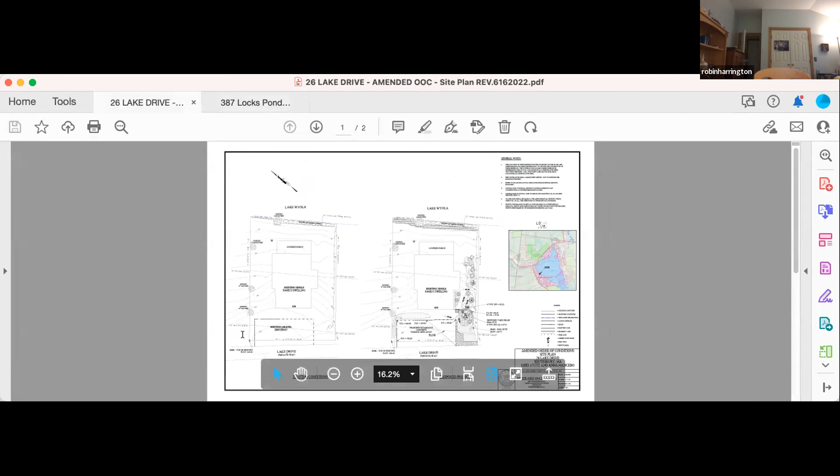Okay, this is not it—that's for a different hearing. Let me see if I can blow it up a little bit. Can you guys see? Is this it? Yep, that's it. All right, so why don't you take a few minutes and just walk us through it?

Okay, so I've come into this project a little bit late, but I'm hoping what we have here will make the commission feel more comfortable with the proposed amendment to the order of conditions, to change the 24 by 55 foot parking area from a gravel parking area to a bituminous concrete asphalt driveway. The portion on the left-hand side is the existing condition: the house is centered in the middle, the existing gravel driveway to the left, I guess the west side, then the fencing, and some existing shrubbery down by the lake. On the right-hand side is the proposed project—the footprint doesn't change, we just make it asphalt.

By doing so, what we now propose—well, I have to blow it up on my side so I can see it. You want me to blow it up more? I can see mine, if it's easier for the commission members to blow it up. Yeah, that would probably be a little helpful.

So what we proposed is we are going to have all of the surface flow from the proposed parking area go through a series of what we're calling rain gardens—not necessarily a true rain garden, but flattened areas with quite a bit of planting in them and some depressions for infiltration purposes. So the flow will go from the left-hand side of the site to the right.

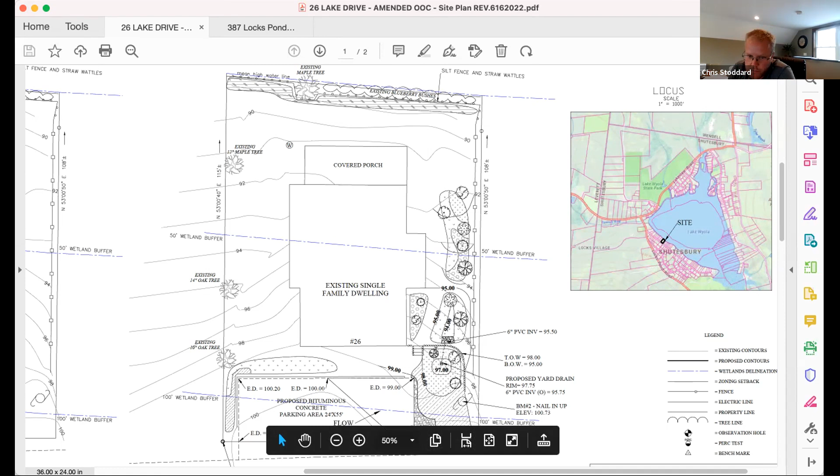It'll go through all these native areas. Here we have a flat area with about a foot of depression in it, right here, that'll basically infiltrate all the water. Anything from a big major storm will overtop into a small 6-inch yard drain, then flow into an additional level spreader, level area.

Which will then continue to infiltrate into there. Any additional runoff, which we're not proposing any, would go down through this third series of rain garden area, basically infiltrating the rest of it. And then, down at the lake, we are showing the added 5-foot planting strip along the length of the property, which was in the original order of conditions.

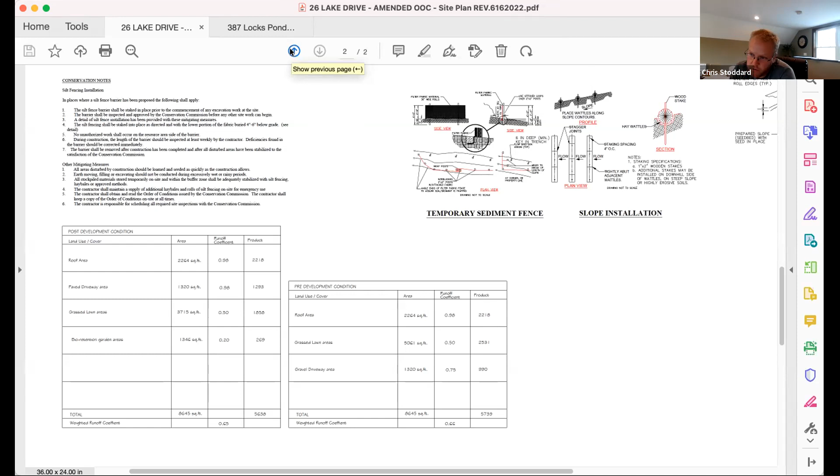So if you go to page 2, what we did is take the pre-development conditions—building, gravel area, and lawn—and compared that, creating a weighted runoff coefficient of 0.66. Then we took our post-development, the proposed project, and we've actually reduced the runoff on the site down to 0.65. So we believe we've proved that by putting the asphalt in but adding these other features, we're able to reduce the runoff from what is currently on the site now.

And you can see too, on the left-hand side, right between the house and the driveway, what we did is add some more plantings in there just in case. The intention is the grading of the parking lot is to go towards the planting area, but we added a little bit more as an added protection. It's not necessary, but you never know—we just wanted to be prepared.

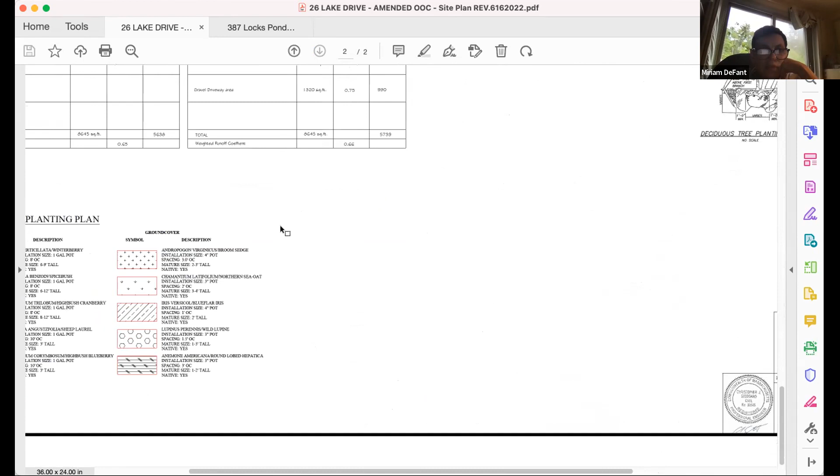We did provide a proposed planting plan on the next sheet with all native species—grasses, let me see if I can find it—below, yeah, right over there. Some winterberry, spicebush, cranberry, some blueberry bushes, wild lupin, sea oats, broom sedge, a bunch of different variations of plantings that we thought would complement the site, but also reduce the runoff rate and help the infiltration of water prior to reaching the pond.

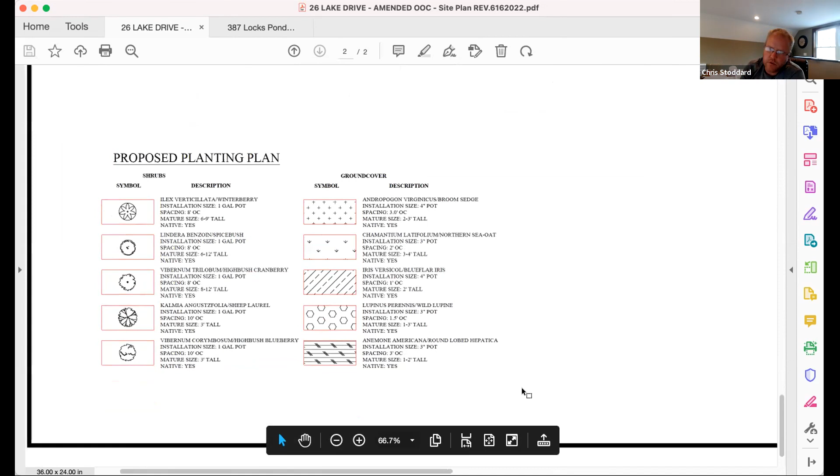We did provide some details, some straw wattles and silt fence details. We are proposing, if you could go up towards the lake—there's a series of existing blueberry bushes right up against the water—silt fencing and straw wattles on the lake side of all the proposed plantings. There are some straw wattles on site currently, but we're proposing to add more right along the edge, so we can plant everything outside of the protected area. Once the site is fully stabilized and the commission has had a chance to do their final inspection, we'd obviously remove that.

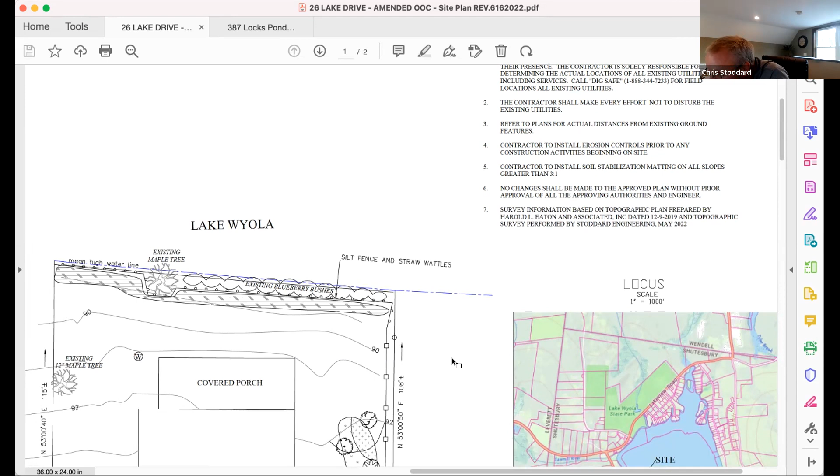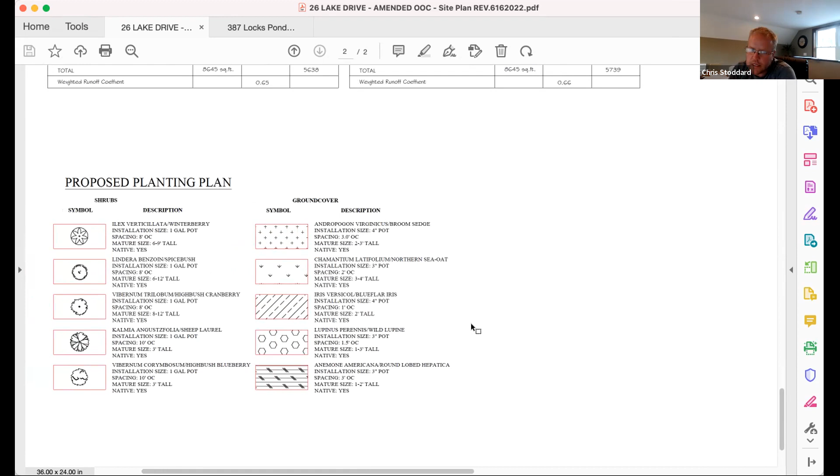And what would be planted down by the lake—has that been decided? We went back and forth trying to find plants that were native but also pretty, I'll call them. I'm probably going to butcher the name—Anemone americana is what we found. They're about a 1 to 2 foot tall bush, spaced about 3 feet apart. They come in 3-inch pots and grow out to be about 3 feet. They're native to this area, a hardy plant for this zone, so we thought that was a nice complement—gives some flowering plants but also serves as that buffer.

Trying to think what else—no trees are being removed, so I know that was a question before. All the existing maple trees and oak trees along the property lines are not being removed, those are all staying. The arborvitaes that were there, everything over there—basically everything on the left-hand side of the structure is staying as is.

So I hope this makes the commission feel a little better about the project, but we can answer any questions that you folks have.

One of the questions I had when we did a site visit—we noticed, and now let me see if I can get this thing to disappear—in this corner where the cursor is, on the right-hand side, it looked like there was a Japanese barberry shrub. We were wondering whether the landowners were planning on keeping that or if they'd be open to removing it, because it's an invasive species.

I guess I could have, if Anna wants to answer that question. What, I'm sorry, just if you wouldn't mind putting your cursor there again where it exists, Miriam?

Yeah, it's hard to see because this control panel keeps popping up, but it's in this corner to the right-hand side, somewhere right here. What does that look like, Miriam? Just remind me, is it like a pine tree or something? No, it's a shrub. Robin, do you want to describe it?

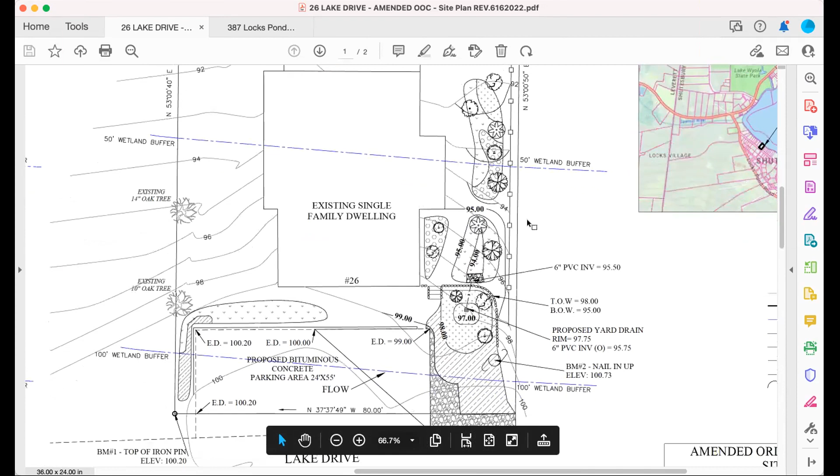Okay, I don't know what it looks like, so I'm drawing a blank, you guys, but I think that's up by where Susan, our neighbor, parks or something. I think it's right on the corner, it might be on her land. I don't know, we'd have to... we didn't know when we looked. Let me see if I have a photo.

Okay, well if it was on your property, I wonder if I might be able to pull... if I stop this, I could go get a book and hold it up to my video. I could probably pull up the site visit photos, because I think it's on the site visit photos. So if you want to give me one second.

Tiny red berries, very small leaves. It sort of grows out from a center point in the ground and all the branches go out. Part of the problem is when those branches, the tips hit the ground, they can root and keep spreading. So you can have a whole field of this stuff and it could be one plant. It's insane.

Trying to see... I mean, I don't know why I'd want to keep it, to be honest with you. It just sounds terrible. I think I just found the picture. Okay, well let me show you, and you can tell us whether you think it belongs to you.

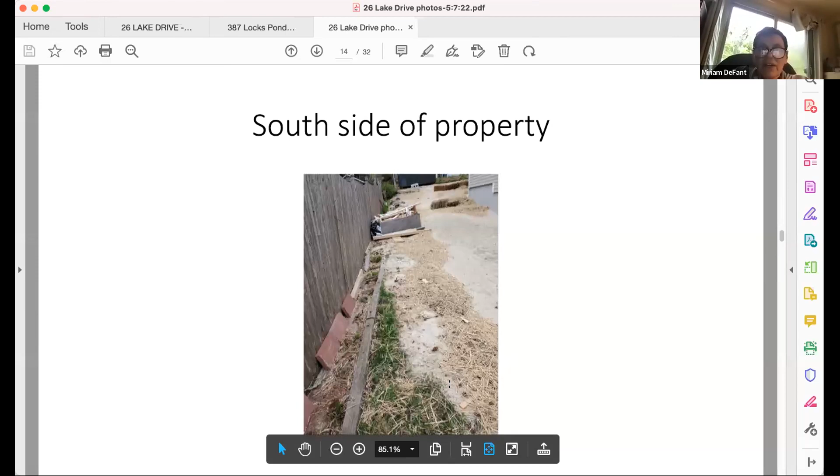So if you look at this photo, I think it's the shrub right up here. Yeah, I think, okay, yeah, I mean we can yank that, absolutely. Might even have gone by now. I mean, we've done a lot of cleaning up, Miriam, since then.

Okay, great. It has very sharp thorns. Oh, okay. I don't remember when I surveyed, because I had to locate the contours all down around there. I don't remember it being there.

But again, I think we're definitely amenable to removing it. That's part of the project. Yeah, sounds thorny, let's get it out of there if it's there.

Yes, has anybody... I'm just gonna interrupt for a second. Has anybody figured out what happened to Beth? Oh, I called the number, got no answer, got no answering machine.

Okay, well, does anybody have any questions for Chris or for the landowners? I'm gonna try and call Beth for a second and see if I can reach her on her cell. I think the cell is the number I had. I could try to look her up for a landline. I have her number, if somebody else has any questions for a sec while I'm doing that.

Of course, it's not showing up. Not right now. Miriam, the number I called was the 219. I don't have any questions. Yep, I don't have any questions either.

My only question, along with Miriam, had been the Japanese barberry. If it's yours, I feel great that you are willing to yank it. Yes, yank it. Yep.

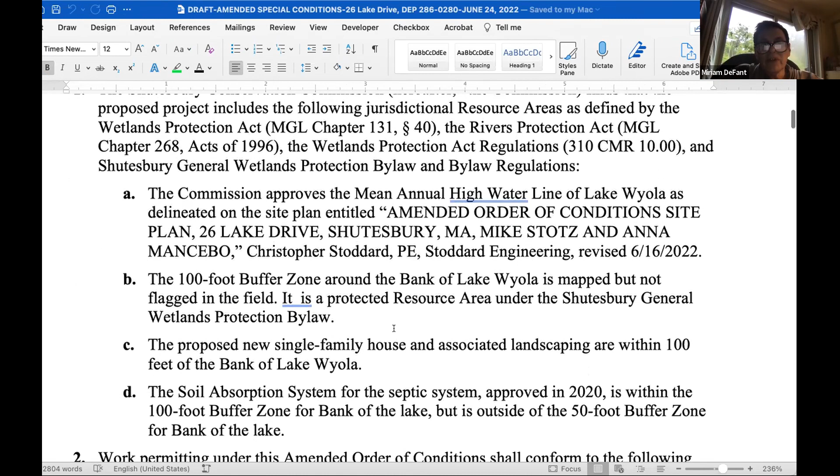We approve the mean annual high water line of Lake Wyola as delineated on the site plan. The 100-foot buffer zone around the lake is mapped but not flagged in the field. It's a protected resource area under the general bylaw.

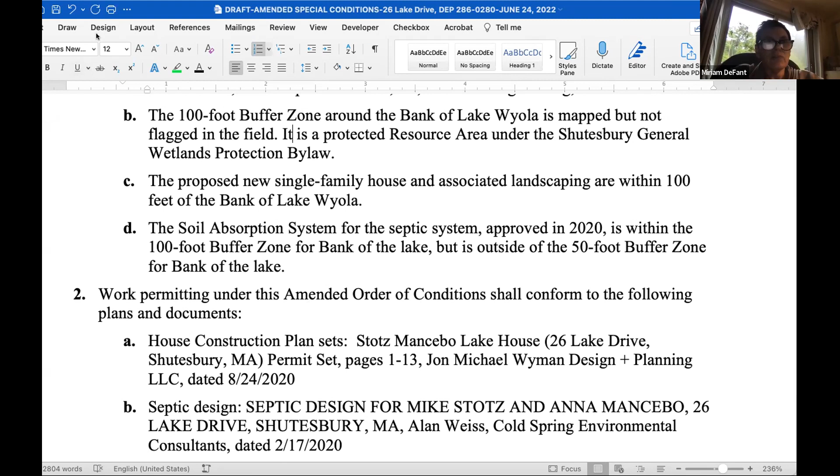The proposed new single-family home and associated landscaping are within 100 feet of the bank of Lake Wyola, and the soil absorption system for the septic system approved in 2020 is within the 100-foot buffer for the bank of the lake, but is outside the 50-foot buffer. Just making that distinction between 50 feet and 100 feet because the regulations are different.

Work permitting under this amended order of conditions shall conform to the following plans and documents. This was the original house construction sets, and then this is the new site plan submitted by Chris Stoddard, that's in yellow, and then we have the septic design. Does that look all right to everybody? Yes.

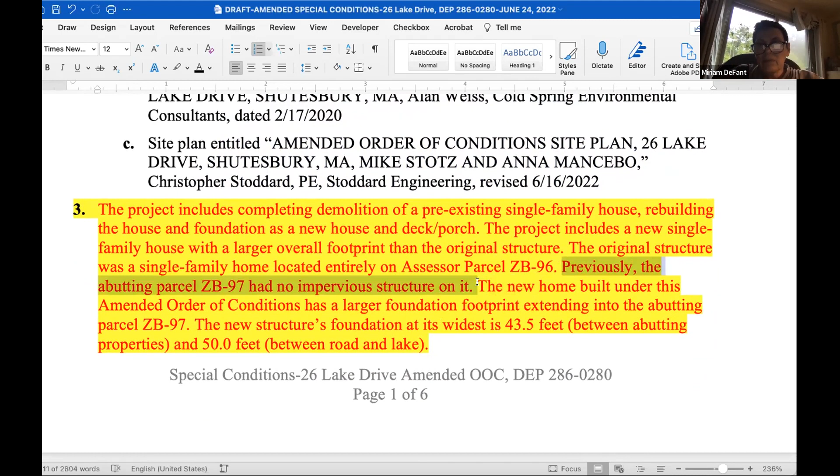And then here was a little blurb about what the project includes, about the house construction. The house includes a single family home with a larger footprint. Original structure was single family located entirely in assessor parcel ZB 96. Previously, the abutting parcel had no impervious structure on it. I'm not absolutely sure that's true, so I might take that out because I'm not certain about that. But the new home built under these conditions has a larger foundation footprint.

And then just the dimensions. Does that look all right? Yes. Okay, and then coming down here, new septic system was approved in 2020.

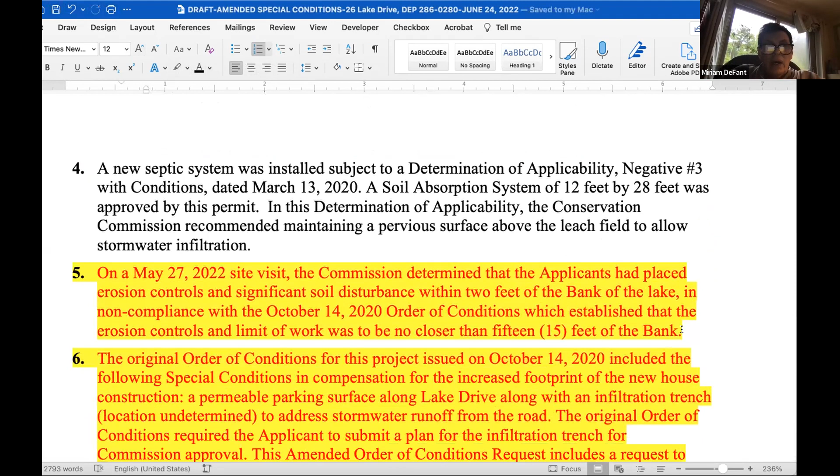I guess I should have said that the original order was approved. I don't say that anywhere, the original order of conditions. Should I say that when the original order of conditions was approved? What do you think, Bob? Is that important or not? Yeah, I think so. So the original order of conditions for this project was issued on October, oh help me out, October 14th? Actually, under number 7, it says the original order of conditions for this project.

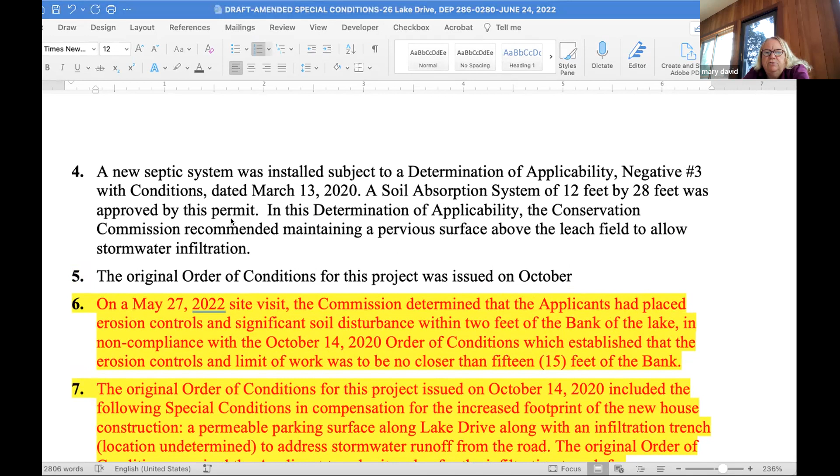Oh, see, right, I have it. I even had it. Okay.

Here I have just an observation from our site visit. Was that when we did the site visit or was it earlier? That can't be right, wasn't May 27th. It was May 7th. On the May 7th site visit, the commission determined that the applicants had placed erosion controls.

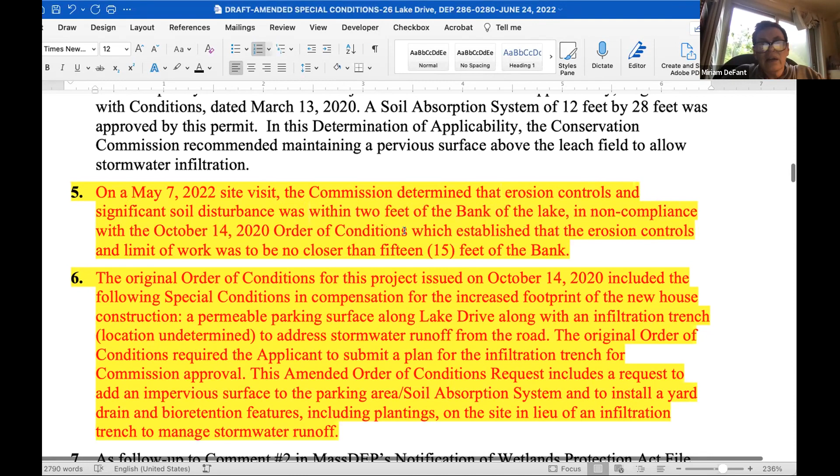Erosion controls and significant soil disturbance was within 2 feet of the bank, in non-compliance with the conditions which established that the erosion controls and limit of work was to be no closer than 15 feet of the bank. So just kind of calling attention to that piece.

Is that okay? Yes. And then here we have just a summary of what the original order of conditions were, that there was this requirement for an infiltration trench. They had to submit a plan for the infiltration trench for our approval, and no impervious surface on the driveway. So summarizing what the request was.

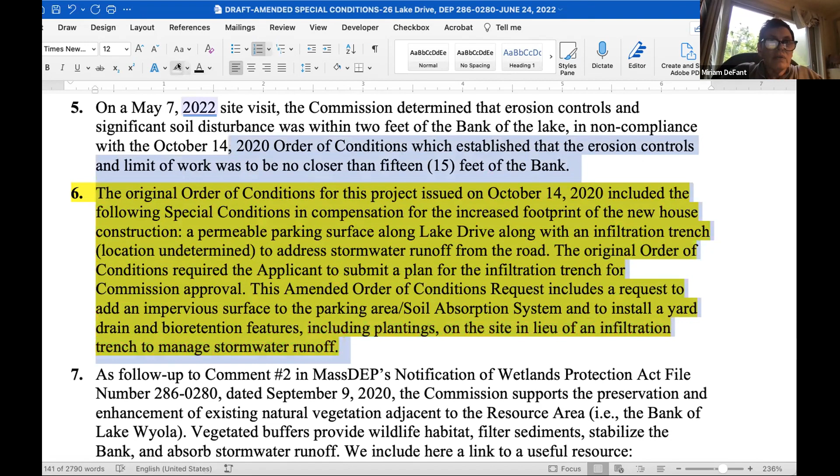And then comment from the original DEP, comments from the original notice of intent. This is again something about just a recommendation for using natural vegetation to stabilize banks, noting that Lake Wyola is a priority habitat.

And then here is the language that we find that they've met the evidentiary standard for having impervious surface on the soil absorption system, and that we find they've met the evidentiary standard for the yard drain and bioretention features. Is that all right? Yep.

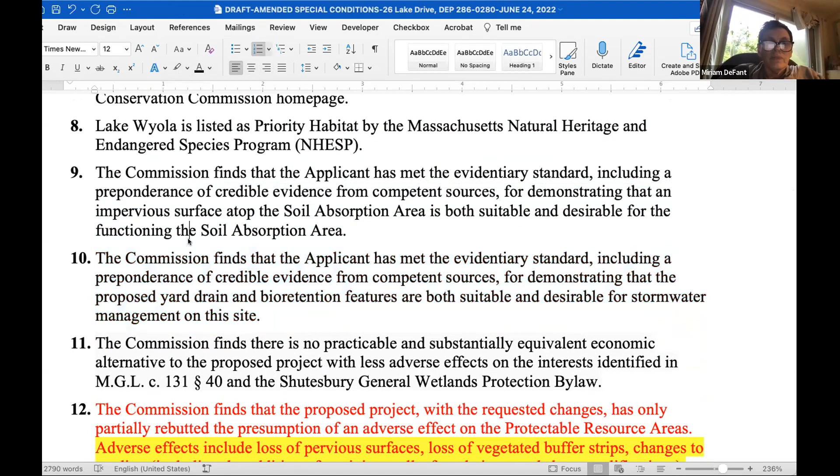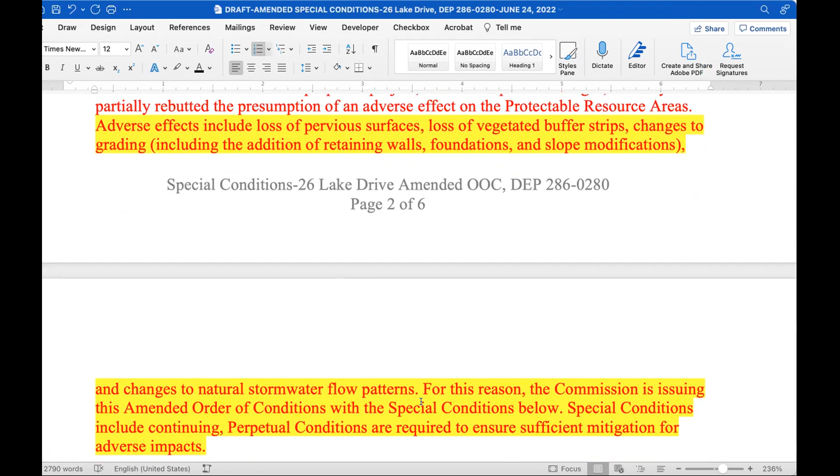And then here was a question I had. Commission finds that the project with the requested changes has only partially rebutted the presumption, or has rebutted the presumption, because if we say partially, and we want them to have, for example, the 5-foot vegetative buffer as a perpetual condition, then I think we would say partially. Also, because the limit of work went farther than was permitted in the original permit. Right.

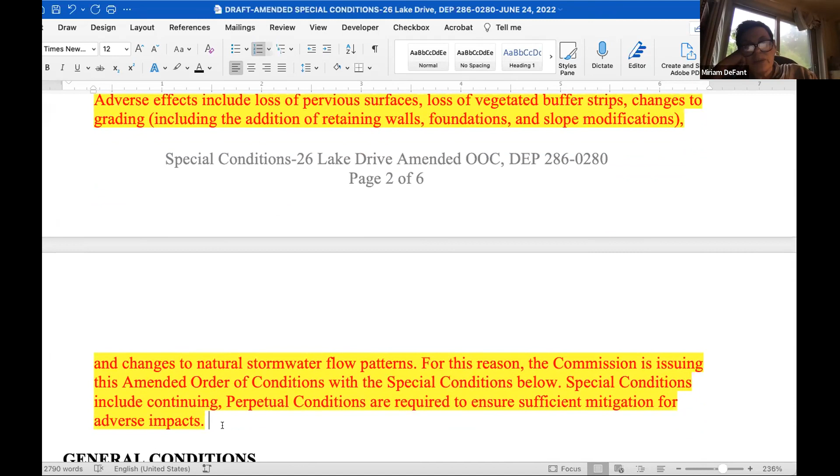Because if we're going to have perpetual conditions, we should be explaining the rationale for it. Is there a way, Miriam, to, and I don't know if this makes it easier or more difficult, but to tie that condition to the work that's been authorized?

So as long as the improvements that we're permitting are on site, this condition of the vegetative buffer would remain. So it's tied to the mitigation for the work that's being done, more than as an ongoing perpetual condition, regardless of whether or not these improvements stay over time. It may be a distinction without a difference. I'm not sure.

I don't know, I don't know. I guess I don't understand exactly what you're saying. Well, one would be - so I think what's being proposed here is, let's see if I can explain it better, a perpetual condition. So that would mean that this strip would need to remain in perpetuity as native vegetation, unless they came back and requested a modification.

Right, and I guess in my mind that adds a little bit of ambiguity in terms of what would be the rationale for requesting it, and what would the future commission be using as a condition?

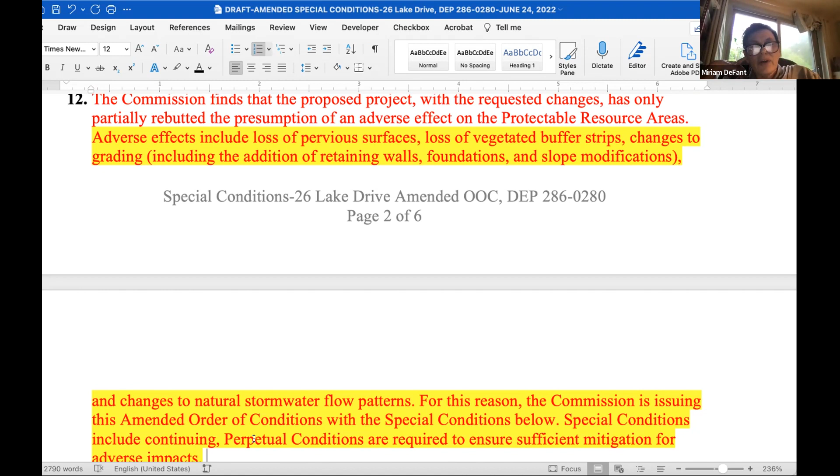The rationale for the original buffer strip was because they were approving a large - what the commission at the time felt was a large, I don't want to debate whether it was large or not, whether the commission was correct or not - but because they were approving a significant increase in impervious surfaces on the property. Yes, so this was a mitigation for that impervious surface, and because it would protect the bank.

Yes, and so what I'm suggesting is to tie it to that, so long as that larger footprint of impervious surface remains, that the buffer zone would remain. But that's specifically what we're looking to mitigate.

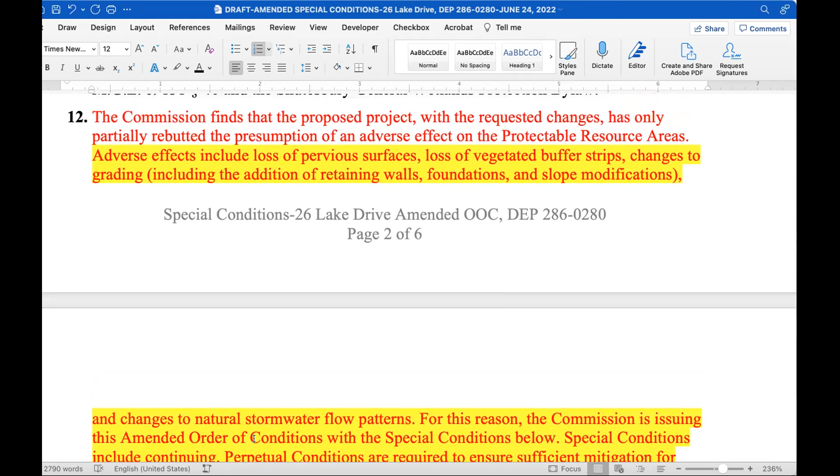So if they, for instance, if they took - isn't that what this is saying? It says the effects include the loss of pervious surfaces, loss of vegetated buffer strips, changes to grading, and changes to natural stormwater flow patterns.

Yes, but I think I'm picking up on the concern that was raised, which is the requirement of maintaining this in perpetuity. So is it clear that really the requirement isn't in perpetuity, it's for as long as these impervious surface improvements remain? That's my point.

Well, if they don't remain, I think they can always request a change, but we're permitting the order of conditions with the assumption that these are now the existing conditions, this loss of pervious surfaces. So the perpetual condition is based on what the existing conditions are, not on a hypothetical. I mean, if for example the house burns down or they demolish the house and let it go back to grassland, then they could come back and modify the order of conditions.

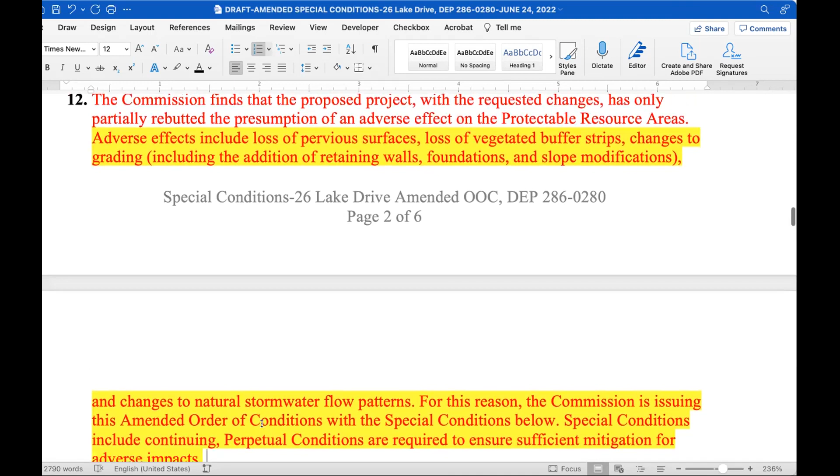Yeah, I'm just saying for purpose of clarity, my recommendation would be tying it to, for as long as these improvements of the impervious surface remain, that this would be a requirement. So I think it could be made more clear by modifying that language.

But then it isn't really a perpetual condition, and it doesn't really spell out the conditions under which they would come back for a conservation commission review of it. So if we don't have it as a perpetual condition, then there's no mechanism for the commission to review the change, Scott.

I mean, I think it's cleaner because I think that - anyway, what do other people think? I'm talking a lot. So Mary Beth, do you have any thoughts about it?

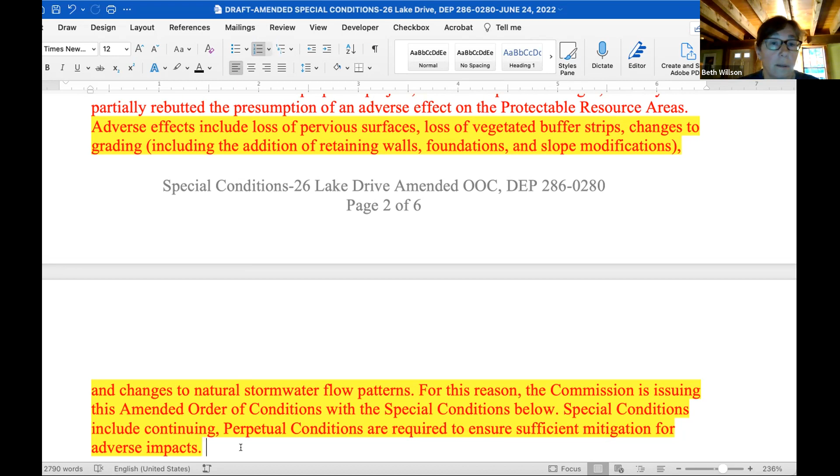I think the way it's written is fine. It makes sense to me. Yeah, me too, actually. Yeah, I think what's written is fine as it is.

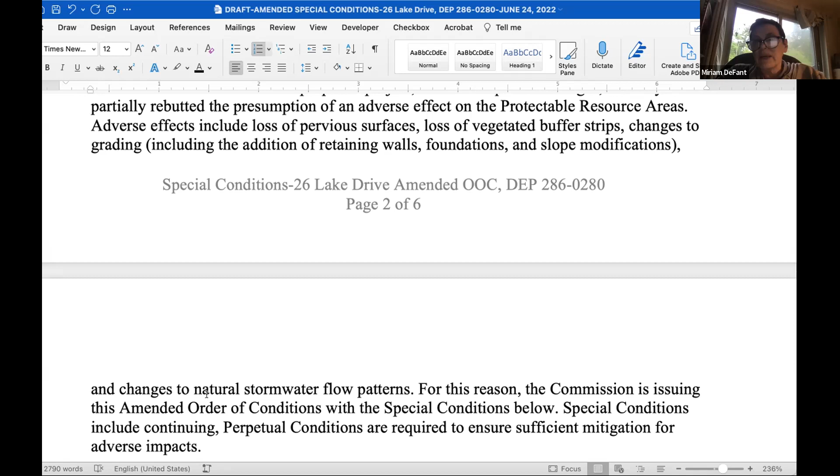Okay, I mean, it's not forever. If it is an unbearable condition, for example, let's say the bank starts collapsing and the landowners absolutely feel that they need to put in a hardscaped retaining wall along the bank, they could come back to us and we could modify those conditions based on whatever work they're proposing. So there can always be a mechanism for amending this later if it becomes necessary for the property.

Yeah, I do understand that. I think for clarity, and I understand I may be in the minority here, but I do think tying it - really it's not really a perpetual condition that we're looking for to go on regardless of the site conditions. It's tied to the improvements of the impervious surface that are being made. And so I think making that more clear would help a future commission make a decision, but I understand where you're all coming from, and I understand the rationale for making it perpetual might make it easier for the commission to entertain any future changes.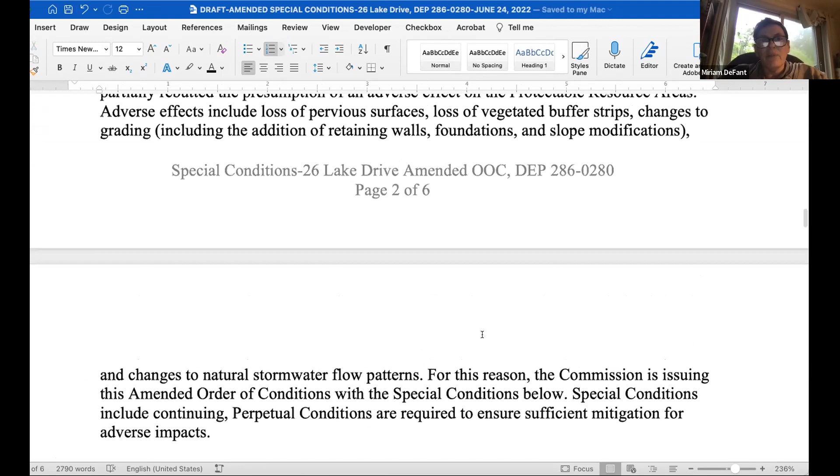Sure, I'm just saying - okay, I would do it a different way. Yeah, okay, I think it's clear. I think it is clear for future commissions to understand what our rationale was and what factors we were taking into consideration, which is really kind of the point of this, so that if there is any reevaluation in the future, it can be understood what was the commission thinking.

We need to move along. I'm looking a little bit at the time, and I know we have another public hearing in 10 minutes. So this is boilerplate.

So all of this is our standard general conditions. Nothing is new under pre-construction phase conditions. So here, I had a question.

Approved erosion controls identified in the above mentioned site plan shall be installed and maintained between the project area and the bank of the lake. Now, I put in here 15 feet, but Chris was mentioning that they want to put the erosion controls just outside of where the limit of work is right now. So we could just leave this out.

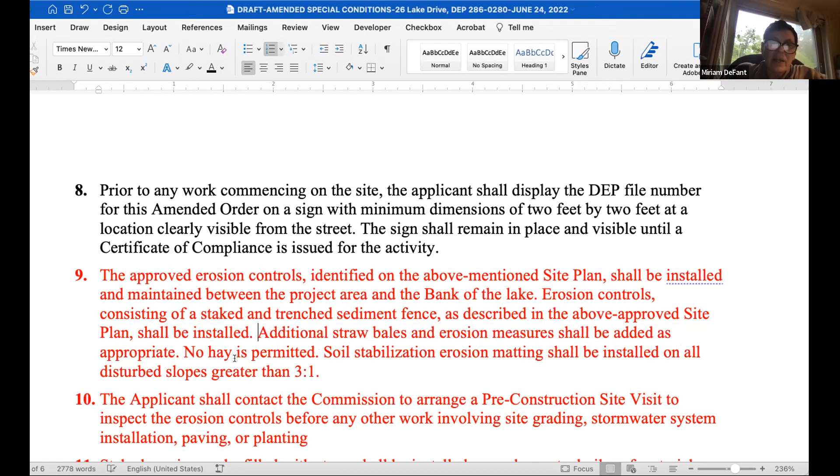So we can just say as described in the approved site plan. And how's that look? Does that look all right? Yes. Okay.

Then applicant will arrange a pre-construction site visit to inspect the erosion controls.

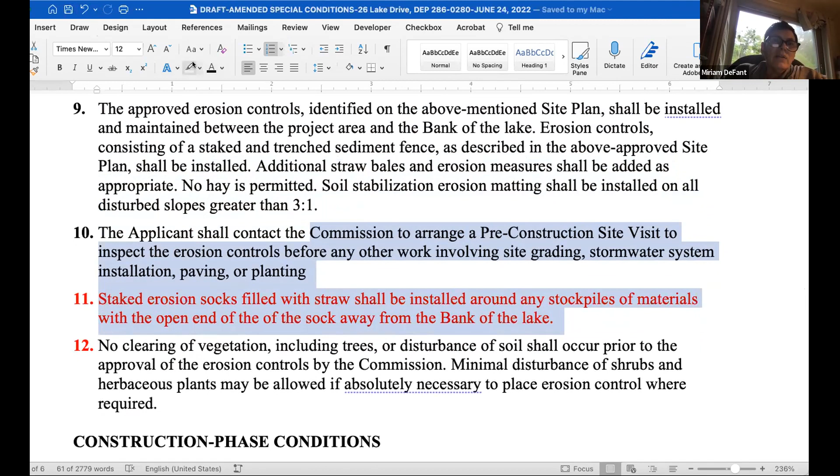Erosion socks installed around any stockpiles of materials with the open end of the sock away from the bank. I don't think that they actually talked about stockpiling. That's why I put this in here as just an added condition.

And then here, no clearing of vegetation shall occur prior to the approval of the erosion controls at the site visit. Minimal disturbance of shrubs and herbaceous plants to place the erosion controls. Look, is that all right?

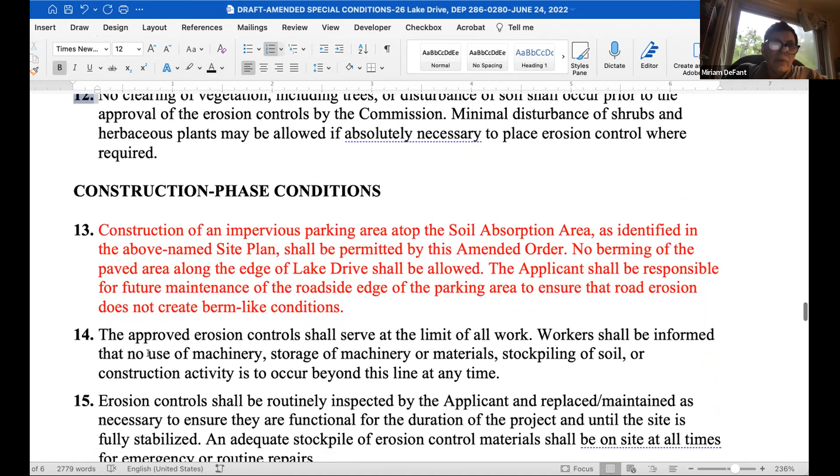Yes. Then construction of an impervious parking area atop the soil absorption area as identified in the above named site plan shall be permitted by this amended order.

No berming of the paved area along the edge of Lake Drive shall be allowed, and the applicant should be responsible for future maintenance of the roadside edge of the parking area to ensure that road erosion does not create berm-like conditions. I'm not sure if that makes sense or not, but that does.

It does. Is that okay? Yes. All right.

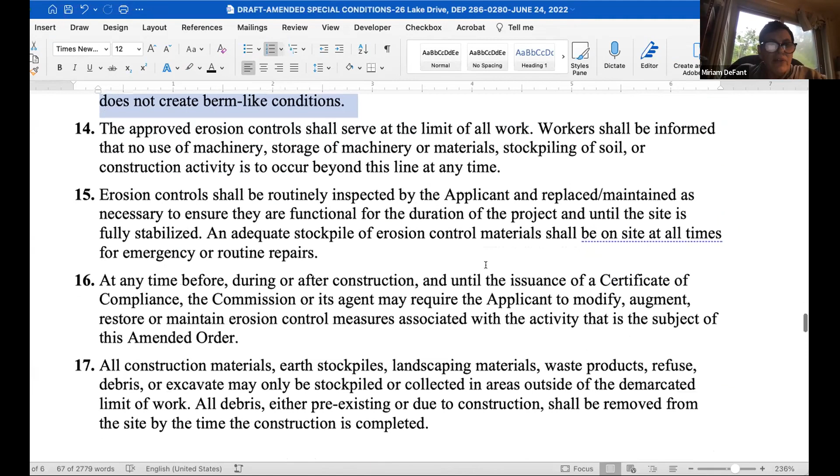Then the erosion controls serve as a limit of work, and oh, I'm losing it. This is all boilerplate, nothing here.

No tree or shrub removals are approved by this amended order except those required for the approved activities, except for the removal of the Japanese barberry shrub, but we think that's already gone. So I could just take that out.

Are we sure it's gone? We don't know for sure. I would just leave it in.

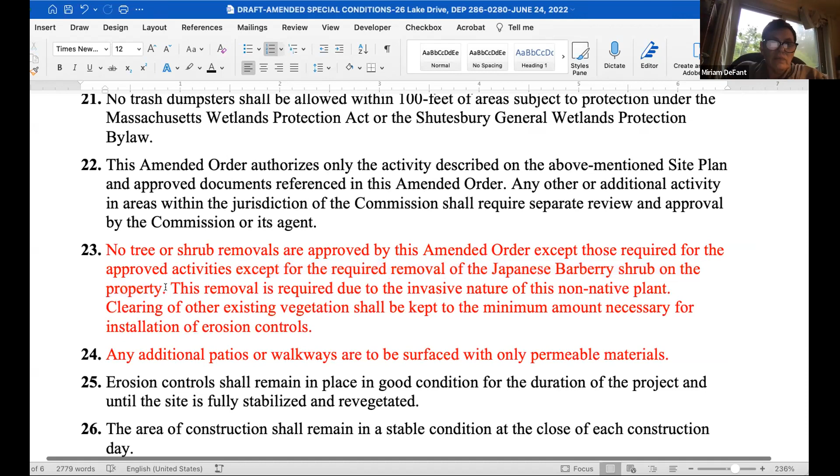Is that a voluntary measure that we're asking for, Miriam? Or the actual condition of approval? I mean, I agree, it's absolutely a good idea to take care of invasive species. I'm just wondering if that's worth listing as a condition of permit approval.

I don't see why it can't be listed. A lot of times we list that it's required that they plant native species or some certain kind of plant in a certain area, and eliminating an invasive.

I mean, I agree it's sort of a general thing. It's not specific to this particular project, but yeah, I'm just wondering about our authorities under the bylaw and the Wetlands Protection Act.

I think it makes sense where there's replanting that we would recommend native species. I'm just saying for removal of existing invasives as a condition.

Well, it wasn't part of their site. So Scott, it wasn't on their site plan. So they identified all these shrubs that were going to be maintained and new shrubs and plants that were going to be added. But this particular shrub was not listed on the site plan.

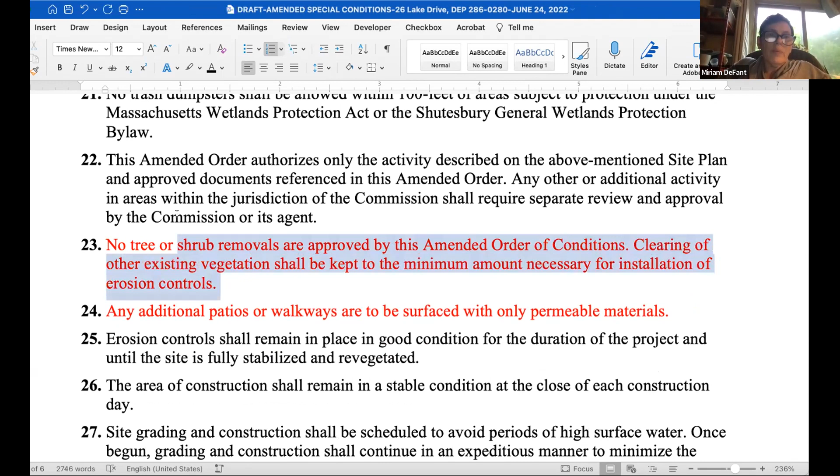To take this language out, and then we're left with this, again, boilerplate that we have used. Actually, maybe this is repetitious. Have we already had this? We have no tree, and then up here, no clearing shall occur prior. Okay, no, this is right. So no tree, this is now pretty much consistent with what we often have in orders of conditions.

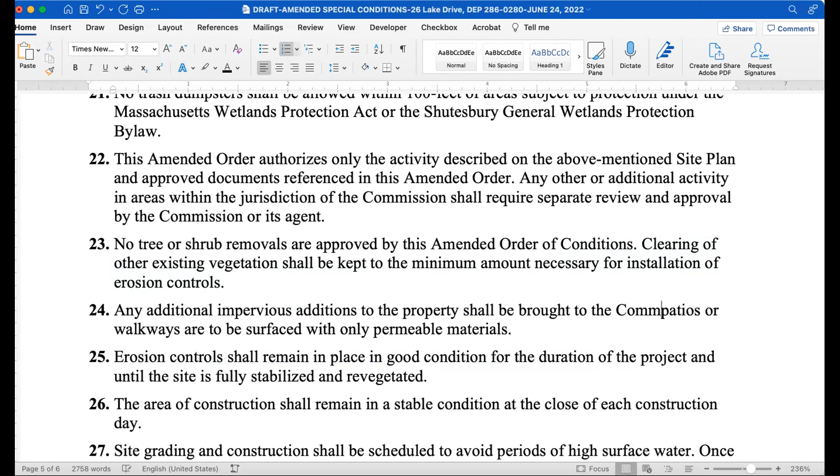Is that all right with you, Scott? Yep, perfect, thank you. Any additional patios or walkways that are to be surfaced with permeable materials? Or we could just say any additional impervious additions to the property shall be brought to the commission for approval. Yeah, I like that much better. Okay, yep.

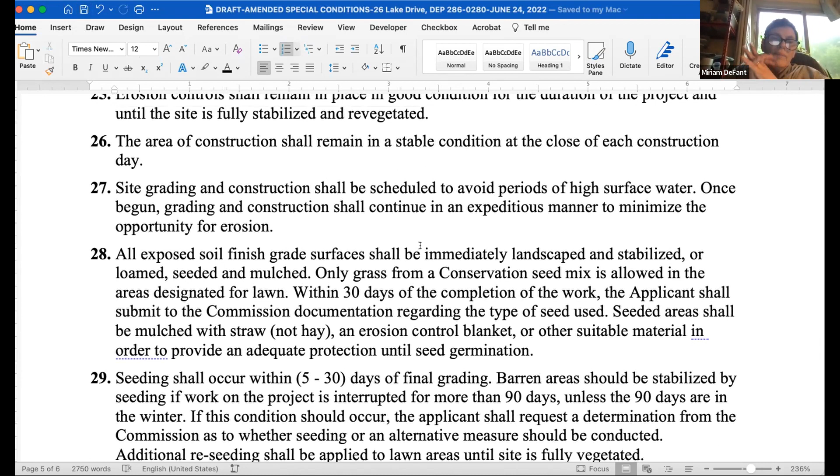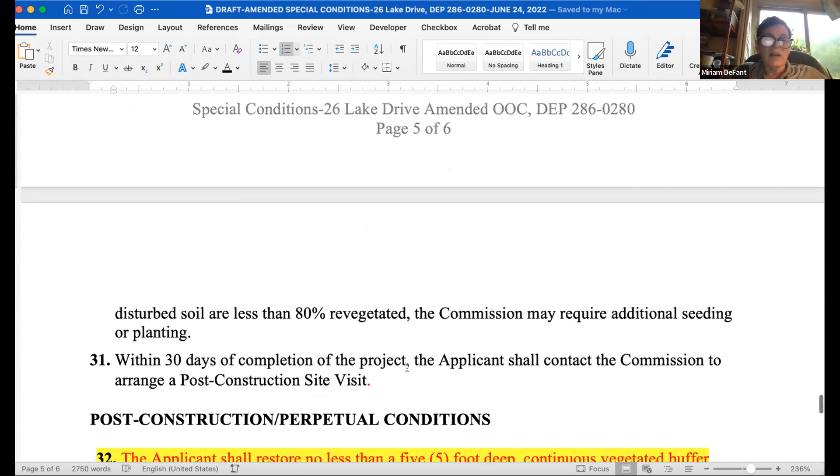And they're responsible for maintaining the erosion control, site grading. Here again, this is kind of the boilerplate about maintaining erosion controls until the property is revegetated, reseeding as needed, and giving us information about the conservation seed mix that they're going to use for the grass, no hay to be used, and then giving us photographs no later than 12 months after the completion of the project to verify the revegetation process. If areas are less than 80% revegetated, we might require additional seeding. Within 30 days of completion of the project, they would contact us for a post-construction site visit.

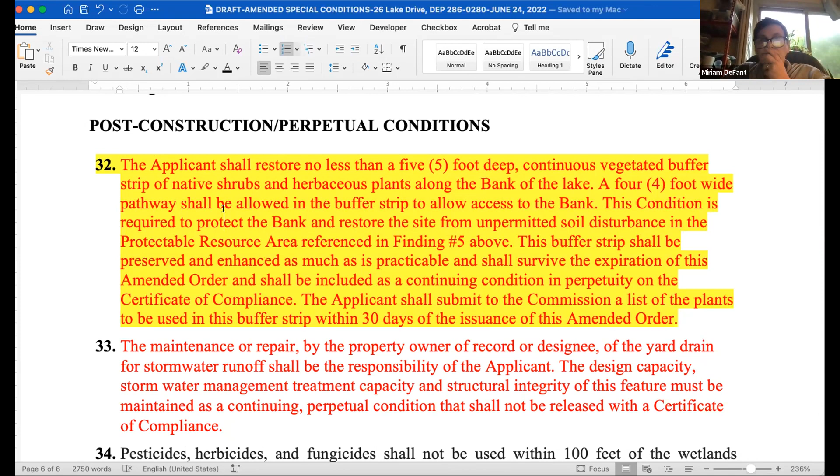So then these are the perpetual conditions. One would be the 5-foot continuous buffer. And what I did in this was to try to make this a little bit more amenable for the landowners, saying that they could have a 4-foot wide pathway to allow access to the bank, because if you live by a lake, you want to get near your water. Want to be able to not have to fight through shrubs. Is that okay? Yep, what do you want to do? That's fine.

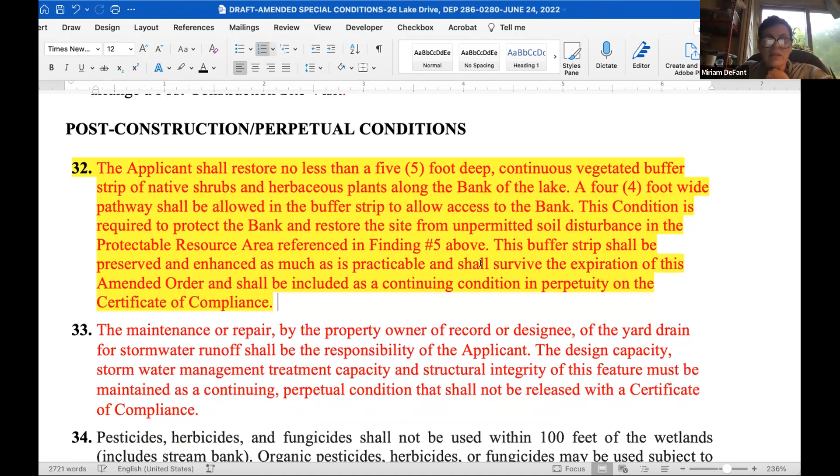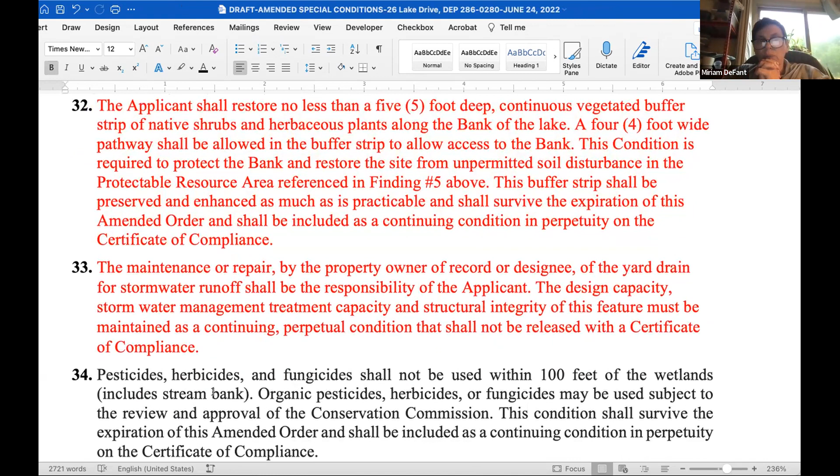So we already have a list of plants, so I don't think we need this. This buffer strip shall be preserved and enhanced as much as is practicable and shall survive the expiration of this amended order and shall be included as a continuing condition in perpetuity. And then maintenance and repair by the property owner of the yard drain for stormwater runoff shall be a responsibility of the applicant. So that also would be a perpetual condition, which could be removed if for some reason that no longer makes sense. Is that okay? Yep. And then these are the other two boilerplates about pesticides, fungicides, and slow release fertilizers.

And this is kind of, we've already addressed this, so that we don't need it. About pervious surfaces.

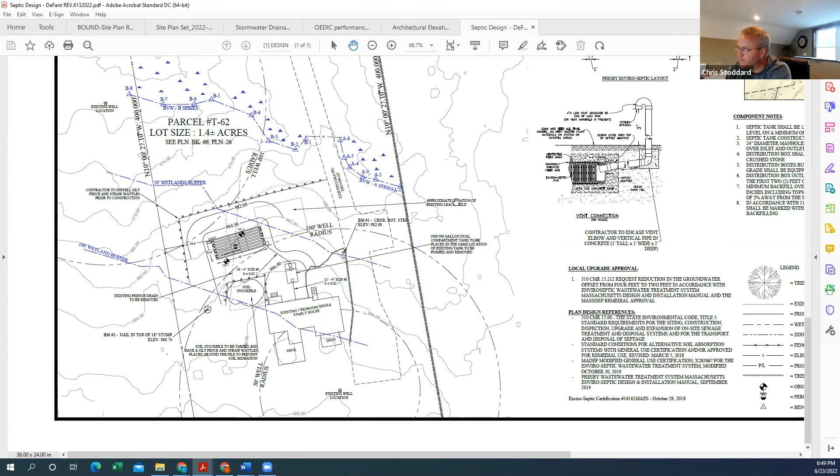I'm trying to think what else. Access will be across the front yard here, across this site. The old tank will be pumped, crushed, and removed. The site will be grassed and seeded once finished. I think that's pretty much it. It's fairly simple, just a septic system replacement.

The only question that came up is what's the closest distance from the limit of work to the wetland line? That's a good question, give me a second. I can bring up the CAD file and give the exact number. I'm thinking it's going to be approximately 40 feet, but I can give you the exact answer in a second.

Chris, do you mind if I make a comment? No, go ahead. It's going to take a second to open. My recollection is that when the finished grading and seeding is done, the footprint of the septic system is outside the 50-foot line, but there's going to be a small incursion of breakout area that goes within the 50-foot line.

Correct. The existing lawn goes right underneath my hand, to here. We're not encroaching any closer than that to the 50-foot wetland buffer, so the existing yard is actually closer than what we're proposing. Yeah, it looks like the closest spot might be where you're showing access, the part you'll drive across to get there. That looks like the closest area, but it's at least 30 to 40 feet.

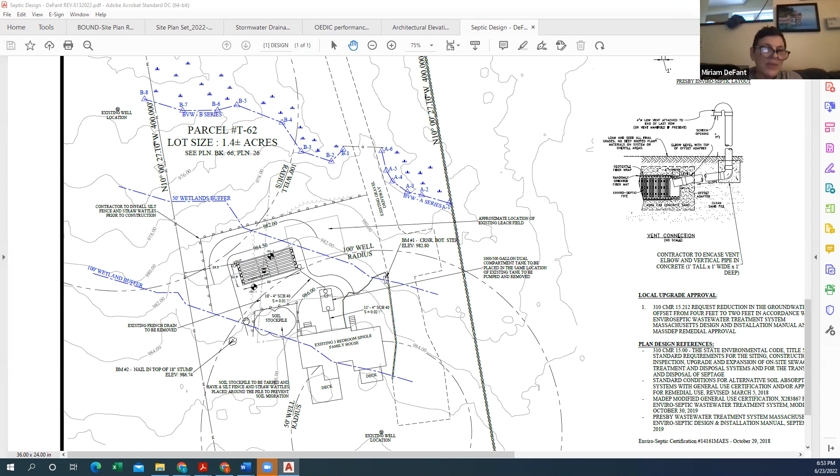Because one of the things that's a little weird is you can't really see it well because it's such a faint line. If we were just to carve out the area - well, I'm not screen sharing, I'm using my cursor and realizing you guys can't see it. I can zoom in a little. If we were just cutting out the trees to accommodate the septic system and the breakout area, it would end up being a really weird little alcove cut into the trees.

So I think we'd want a more gradual, blended tree line up toward the house, toward the south, away from the wetland - away up in here, away from the wetland. So there might be some additional trees near where the soil stockpile is, where we'd try to get them to blend the line, so it's not just this angular cut into the trees.

Does that make any sense what I'm saying? I don't know how else to... Yeah, so what she's saying - basically the cut to accommodate the septic would have been boop, boop, boop, and there'd be this weird bubble of trees here. So kind of coming from where my hand is on a slight angle over to here, because that's the stump you guys have the firewood stockpile next to.

So taking the remainder, I think there's 3 or 4 trees in this area that come out. They're mostly hemlocks, and then one birch tree we would take down. That would be a total of probably 7 or 8, then. Yeah, and the additional ones are all small trees - the bigger ones have to go because they're in the area where the leach field has to go.

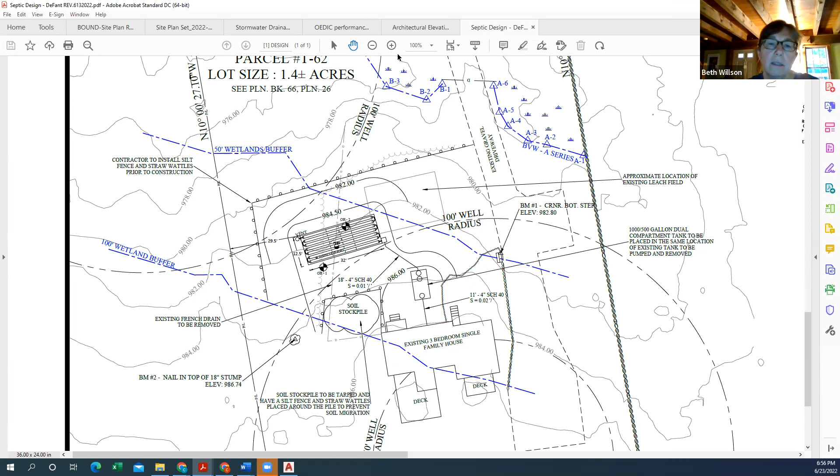Oh, and I guess just to point out - I think everybody read the RDA that the area will be stabilized with a conservation seed mix, and the erosion control will stay in place until the site is stabilized. Yep, yep.

Okay, if there's no more questions from the commission, we can take questions from the public if there are any. How does this work? Do we just wait and see if anybody raises their hands? I'm used to meetings where I'm actually in the same room with other human beings, so doing it this way is a little different. But I don't see anything - anyone from the public, there's no raised hands or anyone, so.

All right, I guess we're ready to close the public hearing. Let me just make sure - there was maybe one question. Someone identified as iPhone, but it's no longer showing as a question, so I'm not sure. Okay, yeah, I don't see - I just opened up all the people. I don't see anything, so.

All right, so I'll make a motion to close the public meeting for 74 Pratt Corner septic upgrade. Second. You have a second? All right, aye. Let's see, David, aye. Harrington, aye. Khan, aye. Wilson, aye.

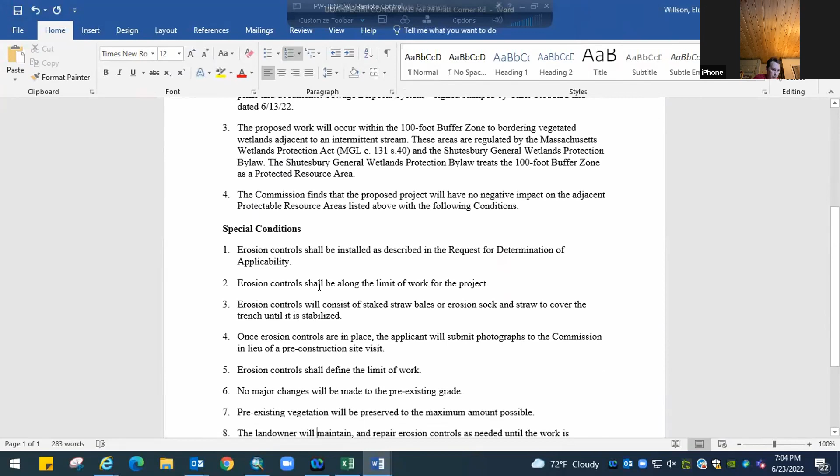Erosion control consists of... erosion control. Does that make sense? Erosion control consists of silt fence with straw wattles.

I guess, is this how you guys want to do it? Would you rather have the applicant submit photographs of the erosion control in place instead of doing a pre-construction site visit? Is that okay with everyone? Yes. Yep, that's good with me. I guess that's something I hadn't seen before, but I think it's great.

Erosion control shall define - we kind of said that already.

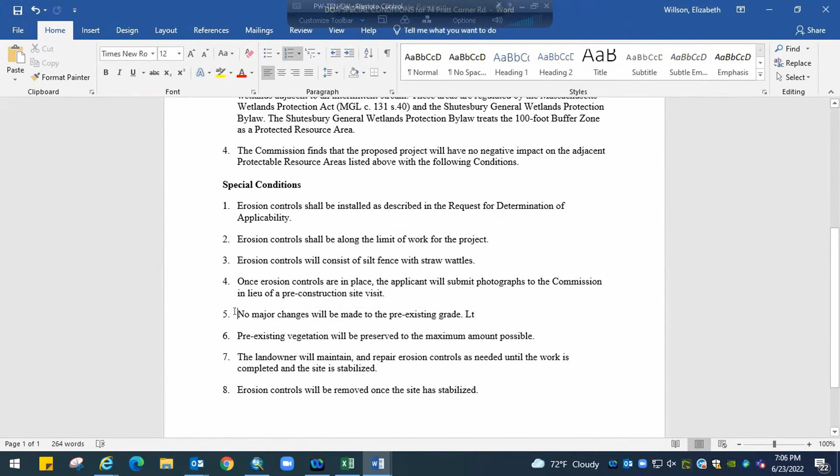I think we did that with Wim Levine's project over on Wendell Road, to submit photos. Yeah, that's where this came from. And I think for these RDA projects, that's great.

It's fine, no major changes will be made to the pre-existing grade. I don't think we need that in here. I kind of like to say...

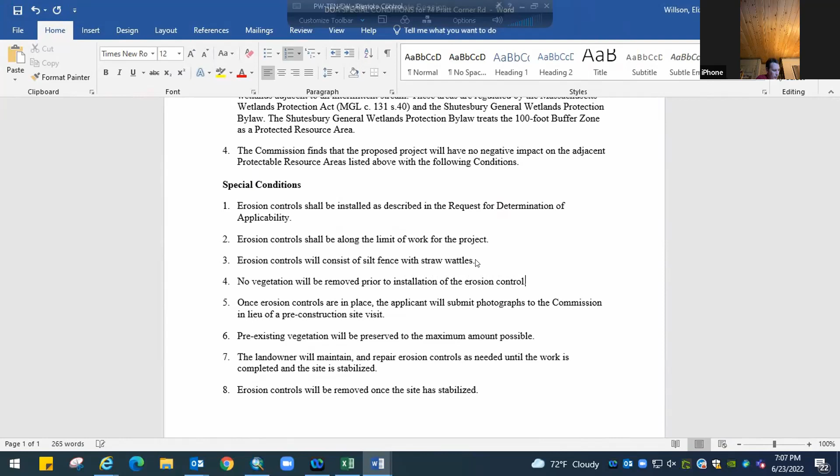No vegetation will be removed prior to installation of the erosion control. Pre-existing vegetation will be preserved to the maximum extent practical possible. Landowner will maintain and repair erosion control as needed until the work is completed and the site is stabilized. Erosion control removed once it's stabilized.

Those are all good. Are there any other conditions anybody would like to add? I'm okay, yeah, I'm fine. That's good to me. Yeah, I think these are sort of our basic conditions for RDAs, and I can't think of anything else.

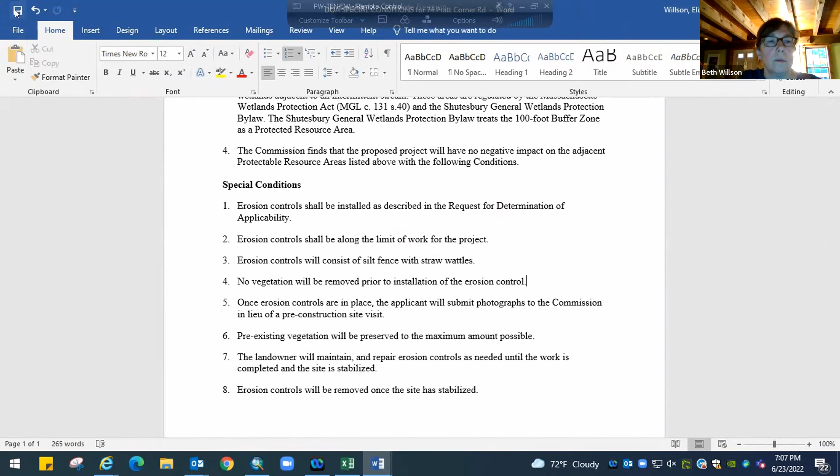Okay, let me stop screen sharing that. All right, so now we can vote to issue the RDA. We need a motion to issue the RDA for 74 Pratt Corner Road. I'll make a motion to issue the RDA for 74 Pratt Corner Road.

I second. All right, David, aye. Harrington, aye. Khan, aye. Wilson, aye.

All right, I did it. Woo, that was great, Beth. Thank you, thank you everybody. Glad that's done. Okay, well, I will take over the reins.

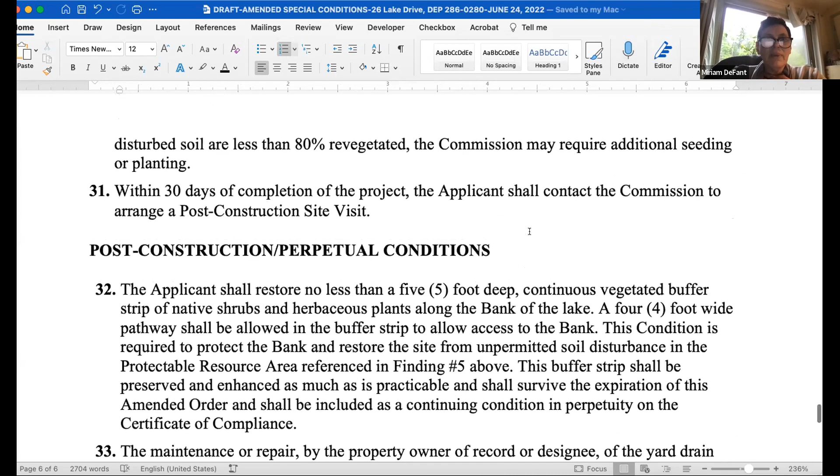Let's go back to finishing up the order of conditions. We have a hearing at 7:30 for the ANRAD, but I think we can finish this up. So these were the order of conditions, the amended order of conditions that we had discussed.

Any other comments about this? Just checking that the numbers are okay. I always want to make sure. Did it... do you see 30? And then it goes to 31. Okay.

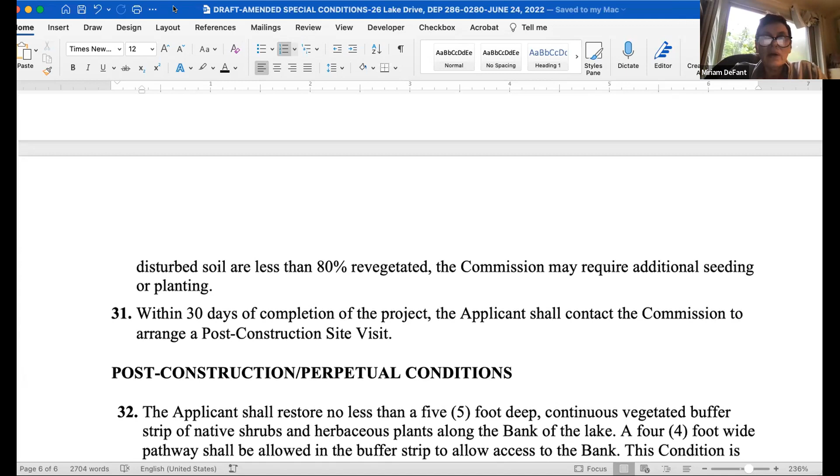So any discussion? No, looks okay. All right.

I wanted to make sure that the Form 5 is filled out correctly. So if we can take a minute and I can get us into EDEP, then we can look at that and take the vote on the special conditions.

Is that okay? Yes. And how do I do this? I go right here. Okay, can you guys see the screen? Yes. All right, I queued this all up, but now I've been booted out. Hold on a second, nobody look at the password.

All right, here we are. So we want this one. So, amended order of conditions...

Be issued tomorrow. Here's the site plans, Chris Stoddard's design. Oh, I didn't put the date. Shoot, what is the date? Does anybody remember what the date is? 6/16. I know I'm not supposed to talk, but... no, you can talk about that. Revised date of 6/16.

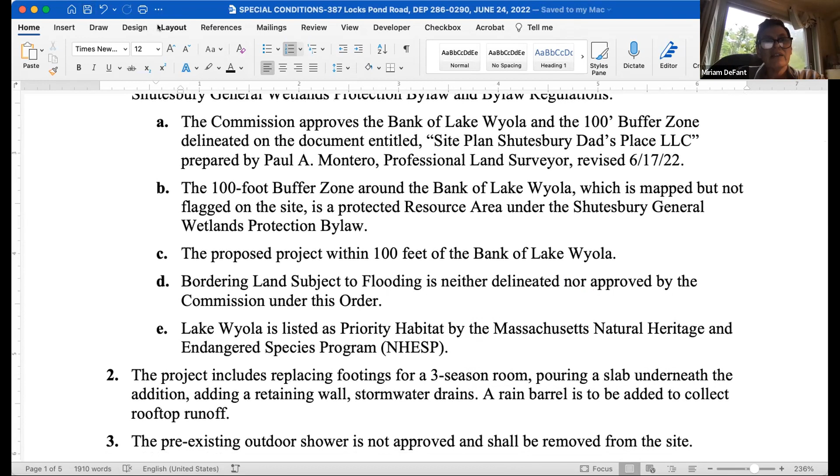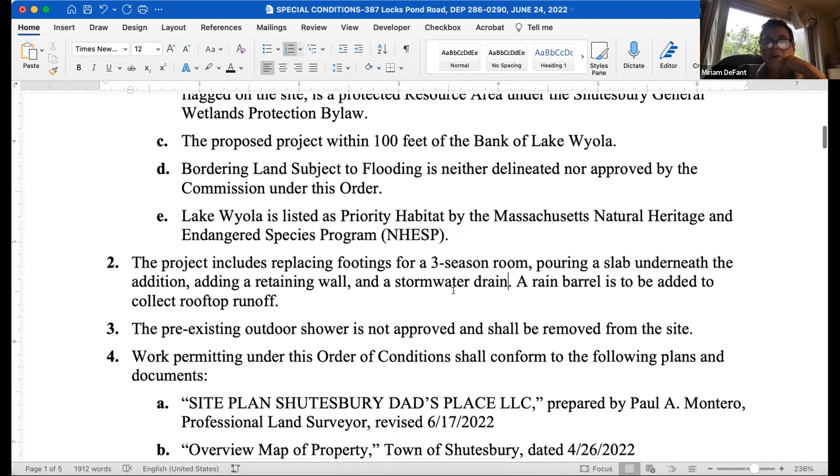This project includes replacing footings for a 3-season room, pouring a slab underneath the addition, adding a retaining wall and stormwater drains. A rain barrel is to be added to collect rooftop runoff. The pre-existing outdoor shower is not approved and shall be removed from the site. The work is permitted under these documents. We find that there's no practicable alternative, and we find that they have rebutted the presumption of an adverse effect.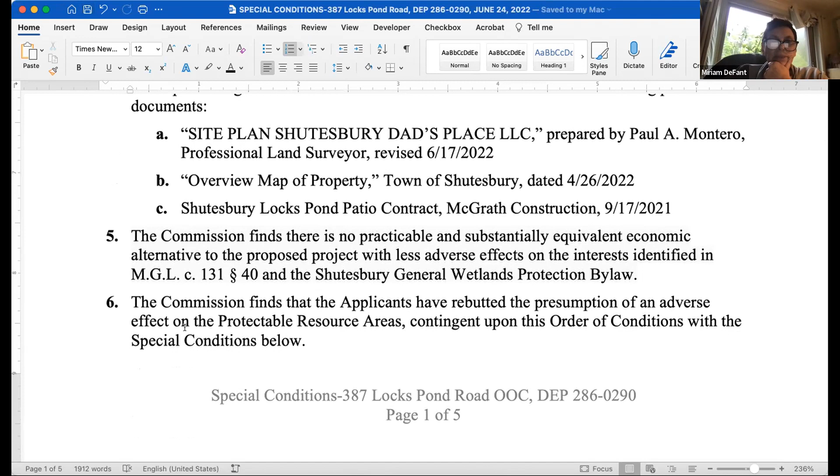Is that all right? Yep. Okay. And then a little blurb about landscaping that I'm just putting in for people's education. So this is again all boilerplate.

Pre-construction conditions: erosion control should be installed as indicated on the approved site plan. Additional straw bales shall be added as appropriate. No hay is permitted. Erosion matting on any slopes greater than 3 to 1.

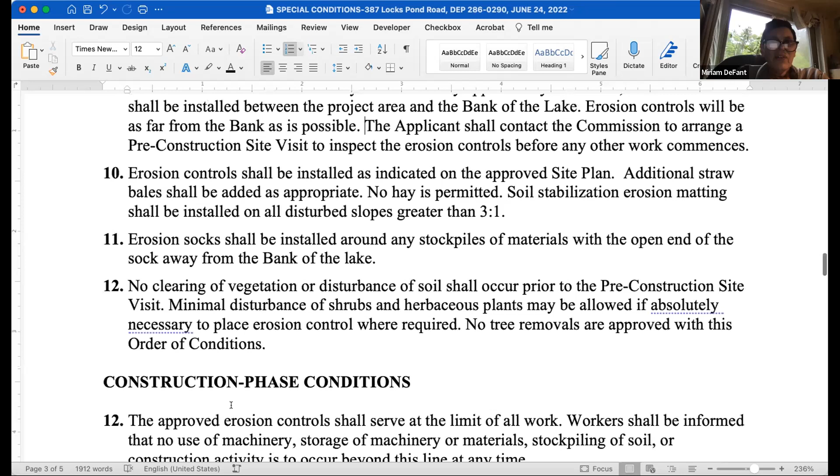And a pre-construction site visit. Do I actually say that they're gonna? Yes, they have to schedule a pre-construction site visit.

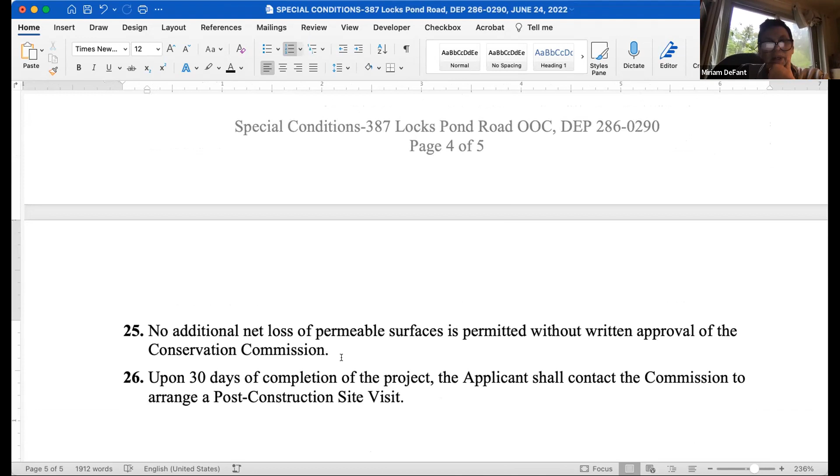And then here again, this is all boilerplate for construction phase impacts about materials and seeding, conservation mix. And then the 2 conditions that we've been adding for pesticides and fertilizers as perpetual conditions. No additional net loss of permeable surfaces is permitted without written approval of the commission. And post-construction site visit.

Does that look all right? Yep, yep, looks fine. Okay, and I'm going to go back into EDEP, if I can get to my EDEP without being booted out. And let me screen share.

And so we are on this one. So we've got the site plan. I didn't put all the other plans, I only put in here this site plan. Do I need to put the other ones that are referenced in the special conditions?

Are they revisions of the same one, or were they different? No, let me go back and look at what they were. They weren't really site plans. One was an overview map of the property, which I don't think we even need because we have this engineered plan. Yeah, I think you can just take that out. And then there was a patio contract that was just like the construction sequence. But again, I think we could take that out too. Yeah, I think here you just really need to refer to the engineered plan.

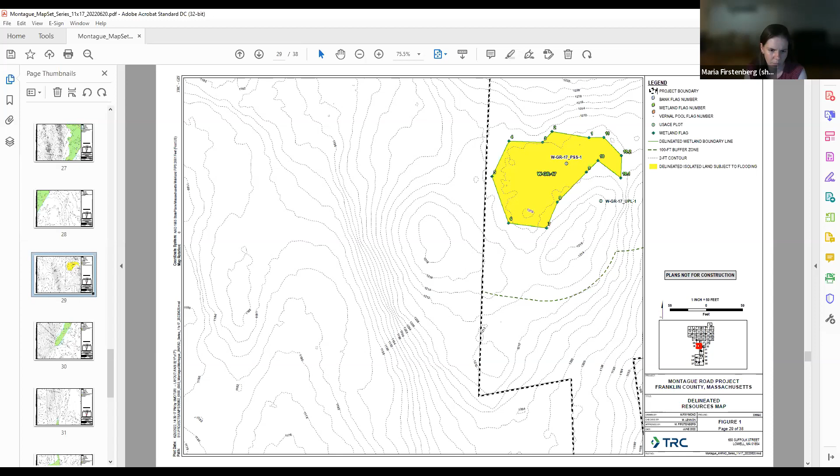And the wetland that you hadn't been able to delineate before, because you thought it wasn't going to be part of the project or an area subject to development, did you go out and finish that delineation? Or did that not happen?

Which area are you talking about? I'd have to go back to Emily's comments. This is Emily Stockman speaking. I believe the area Miriam is referring to is the new boundaries of WGR2, which are depicted, as Maria said, primarily on sheets 23 and 24.

Okay, and yes, Miriam, that area was reviewed in the field. The delineation was expanded, and that is now reflected on the latest plan set.

Maria, are you able to show us the change, like you've done in the past, from when you didn't map that out? I do not have a new change figure because it was a minor change compared to the major changes that happened originally.

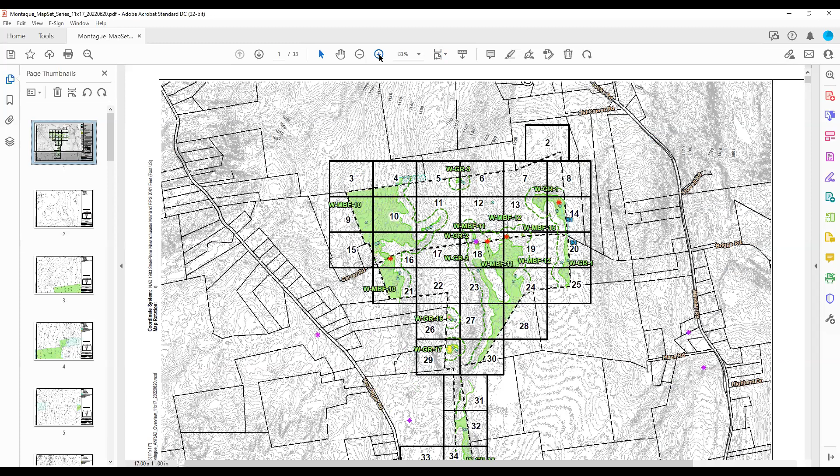We were able to spend a good deal of time on the site on May 5th. Mr. Russo was able to flag that and complete the boundaries. I reviewed the flagging in the field and concurred with the placement, and those flags are shown on sheets 23 and 24.

So just to add, since people can see my screen, I think what's being discussed is that essentially where this upland island is within the wetland, we originally had a boundary limit that went up into this wetland because we knew it was primarily wet, so you would have to cross a substantial amount of wetlands to get there.

So it was not an area of primary interest to the applicant. However, since Emily and Greg added this area in, we did adjust the line to include all the areas that have been reviewed. It is still on the same property as before—it was just that before, the delineation had cut out this section of the property.

Emily, would you like to walk everybody through what your comments are? Sure, I would be happy to do so, Miriam.

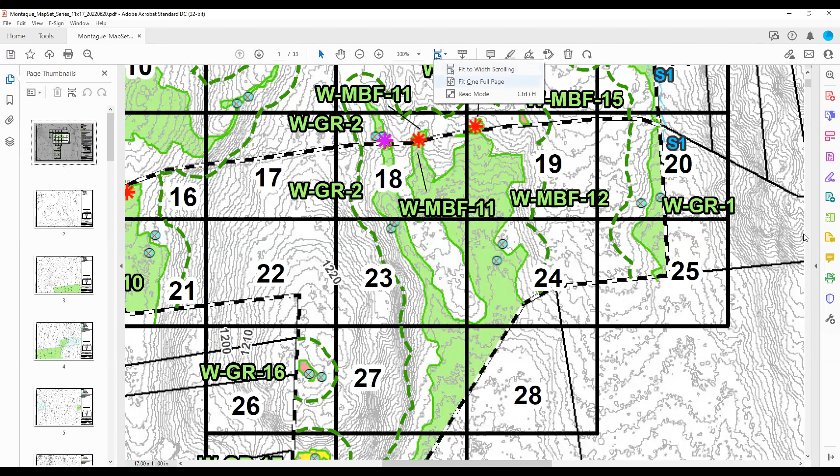On May 5th of 2022, I met Mr. Greg Russo from TRC on the site, and we reviewed the delineated BVW boundary on the abutting property to the north. This has already been shown by Maria on page 4 of 38.

We also returned to the boundary for WGR2. As I was just speaking about, Mr. Russo was able to complete a detailed delineation within that area based on soils, hydrophytic vegetation, and indicators of wetland hydrology. I reviewed the flagging in the field and concur with the placement.

We also visited the isolated wetlands GR16 and GR17 so that I could have a direct observation of evidence of flooding more recent and reflective of the spring 2022 conditions.

As I said, I concur with the new flagging for WGR2. The only comments I had back on June 15th had to do with some of the flag numbers. The flagging sequence from 116 to 123 was not consecutive, so I recommended that TRC review that to see if it was an issue with post-processing. Subsequent to that comment, TRC issued a revised site plan which corrects the labeling of that sequence of the boundary.

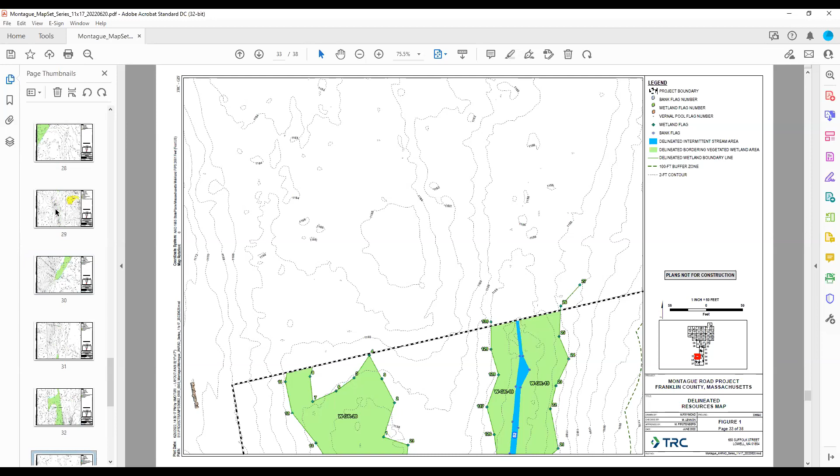However, TRC utilized the maximum observed depth to run their calculations, so that's what I mean when I say they were conservative in their determinations. Using that methodology, they did determine that GR 17 qualifies as isolated land subject to flooding, and I concur with that. Using that same methodology, it was determined by TRC that isolated wetland 15 and 16 do not have the volume base necessary to be considered isolated land subject to flooding. Given the conservative approach taken by TRC, I agree with their determination.

However, should the commission dispute the determination of isolated wetland 15 and 16, the regulations do allow for a procedure to address any conflict of opinion. So the commission does have an avenue to require additional calculations of 15 and 16 if they disagree with the TRC assessment.

Thank you. And Emily, just to be clear, if we didn't have a bylaw, this would be more meaningful because isolated wetlands aren't protected under the act, but these wetlands are still protected under our wetlands bylaw because they're over 1,000 square feet in area. That is correct. All of the isolated wetlands, 15, 16, and 17 are currently protected under the Shutesbury bylaw. In addition, isolated wetland 17 is now doubly protected in that it's also protected under the state regulations as isolated land subject to flooding.

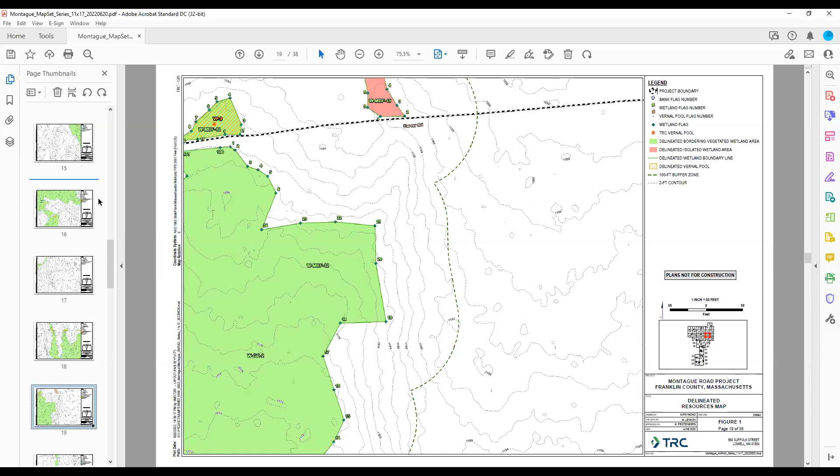Thank you. So any other comments you have or feedback, Emily? No, I believe that summarizes the last wave of peer review. Okay, should we stop screen sharing for now? I don't know if we can, you want to, thank you.

Do any commissioners have any questions for Emily or Maria before we see if there's any public comments? No, I don't have anything. No, I followed that very well. Yeah, thank you. And Janice, do you have any comments or questions? Nope. Okay.

So what about members of the public? Is there anybody? I know, Carlos, you had your hand raised before. Do you still? Yes, is it my turn? Yeah, go ahead.

So I have a new question, and that is, what is the current area of GR 17? And if now the area is increased, what is the new area for that wetland? And does the current flagging reflect the area of GR 17?

I'm going to let you respond, Maria, but what I'm going to do, Emily, I'm going to pull up that calculation. If you don't mind pulling up the calculations, that would be great. But the immediate answer, Carlos, is that the wetland flags for that wetland did not change. The area of the wetland has not changed. What changed was the observed depth. We had originally assumed a depth of about 6 inches, which is the minimum depth required based on our field observations in the fall.

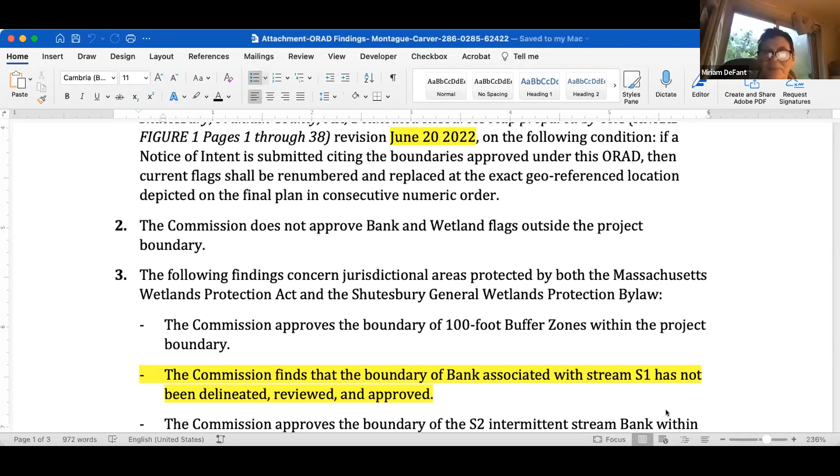Okay, can you guys see it? Yes. I cannot see if anybody has their hand raised, so please, somebody tell me if someone has their hand raised. Okay, so here it is. And this was the final revision date - June 20th, I mean. And I revised that date as well down here.

So we approve the boundaries of intermittent stream banks bordering vegetated wetlands, isolated vegetated wetlands, and isolated lands subject to flooding depicted on this plan set. If a notice of intent is submitted citing the boundaries approved under this ORAD, then current flags shall be renumbered and replaced in consecutive numeric order, which is a condition that we've required on other sites where some of the flagging was wonky.

Is that all right? Yes. We do not approve bank and wetland flags outside the project boundary. That's standard. The following findings concern jurisdictional areas protected by both the act and the bylaw. So we approve the 100-foot buffer zones. We find that the boundary of bank associated with stream 1 has not been delineated, reviewed, or approved. That is because it was encompassed in buffer zone, or BVW is my recollection. Is that right?

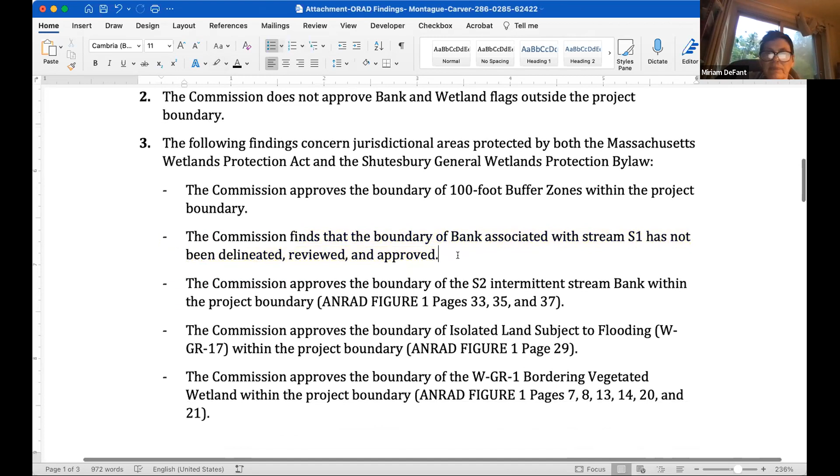We approve the boundary of S2, intermittent stream bank within the project boundary. We approve the boundary of the isolated land subject to flooding for WGR 17. And we approve the boundary of WGR 1, BVW.

And we approve the boundary of WGR 2, WGR 3, WMBF 10, MBF 11, BF 12, MBF 12, and WGR 18, WGR 19, WGR 20. The boundary of land under water bodies has not been delineated and is not approved.

The following findings concern jurisdictional areas protected only by the bylaw. I guess so—if they are, they're just by law only. So the mapped 100-foot buffer zone within the project area is approved as a protected resource.

We approve the boundary of MBF 15 isolated wetland, because this is a protected resource area. Let's capitalize: Resource Area, Isolated Vegetated Wetland. We approve the boundary of this wetland within the project area—isolated vegetated wetlands are protected as resource areas under the bylaw.

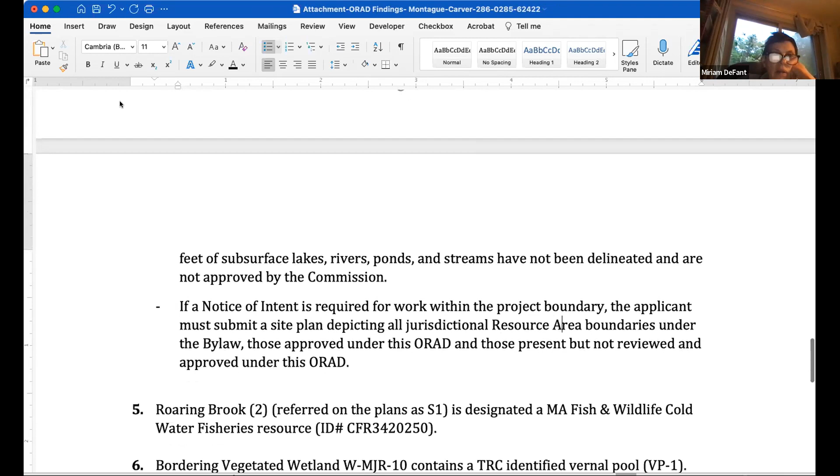And if a notice of intent is required for work, the applicant must submit a site plan depicting all jurisdictional resource areas under the bylaw—those approved by this ORAD and those present but not reviewed.

Any questions about that? Nope. Then we've got Roaring Brook, referred to on plans as S1, which is a designated cold water fishery.

Here's the language around vernal pools that Emily was talking about. So we've got all of these wetlands, all of these bordering areas, all of this vernal pool habitat—some of it certified, much of it not certified, which is just called out here. The only one that I see is actually certified.

And I think that is the end of the ORAD findings. Any comments or questions? Nope, looks good.

All right, so what I'd like to do is just go back to EDEP and make sure I have the form filled out correctly, and then we can vote on the findings, if that's okay with everybody. Let me see if I can get in there still, or whether I've been kicked out. Give me a second, I'm trying to open it, and we got the ORAD.